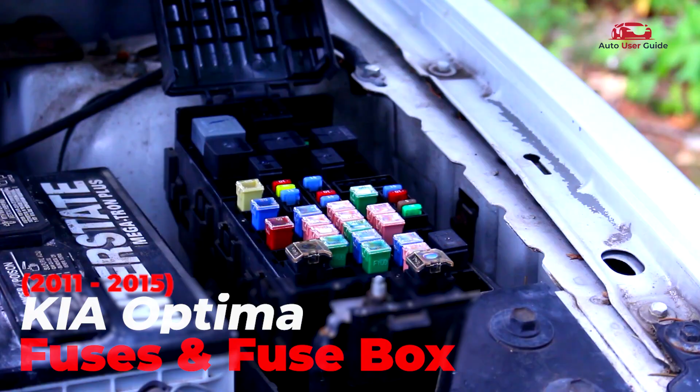Are you trying to locate the fuse box in your Kia Optima 2011 to 2015? In this video, we're checking out all the fuse boxes from the engine compartment to the cabin area. I'll show you where they're located and explain how they keep your sedan's electrical system safe and running smoothly.

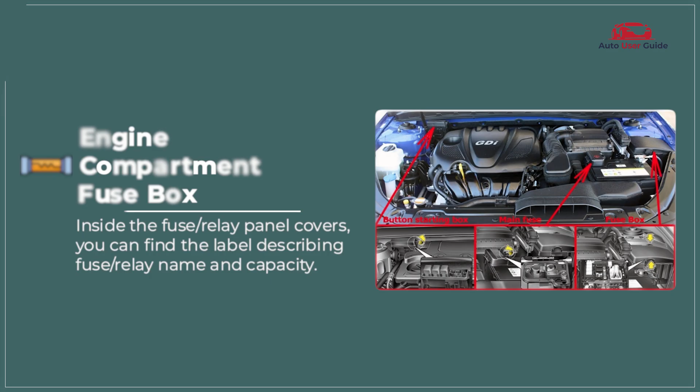Engine compartment fuse box. The engine compartment fuse box in the 2011 to 2013 Kia Optima features protection for major engine and power-related systems. It manages circuits for the engine control module, ABS, ignition, cooling fans, fuel pump, headlights, and other critical components, ensuring dependable performance and electrical safety.

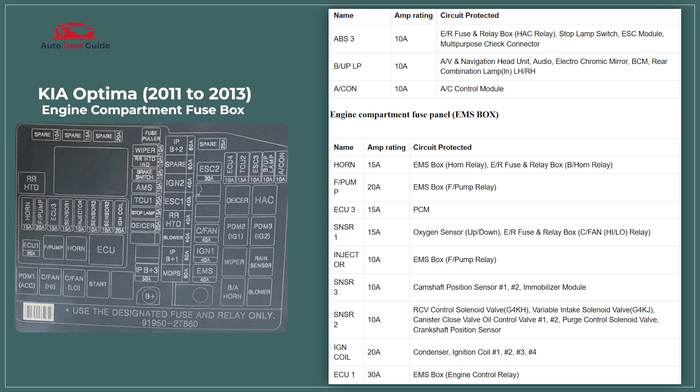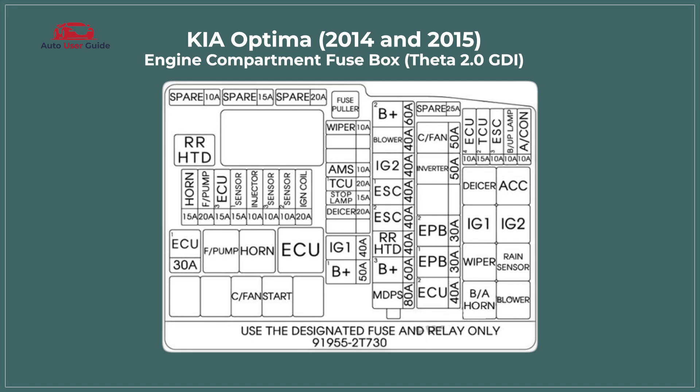The engine compartment fuse box for the 2014 and 2015 Kia Optima, equipped with the Theta 2.0 GDI engine, features protection for critical power and engine systems. It manages circuits for the engine control module, ignition, ABS, turbo-related components, cooling fans, fuel pump, and headlights.

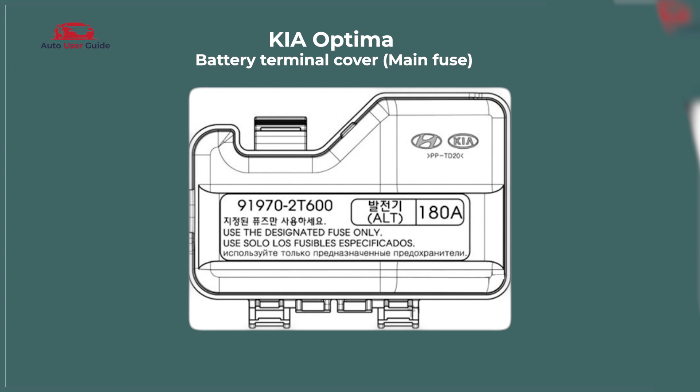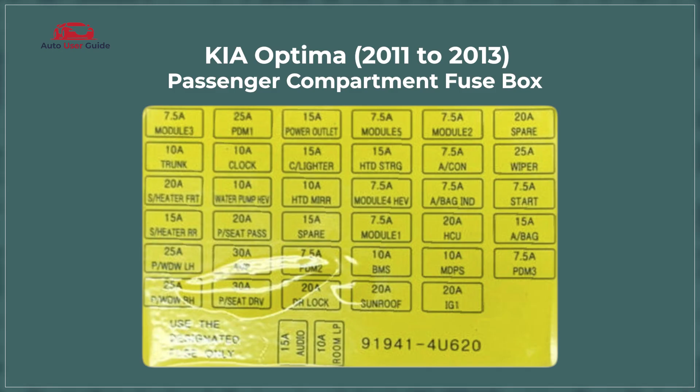Passenger compartment fuse box. The passenger compartment fuse box in the 2011 to 2013 Kia Optima features protection for key interior electrical systems. It controls circuits for the power windows, audio system, interior and exterior lighting, central locking, and wipers, ensuring safe and efficient operation of in-cabin functions.

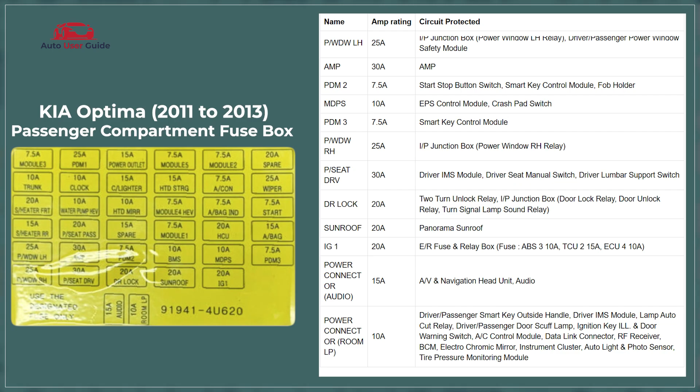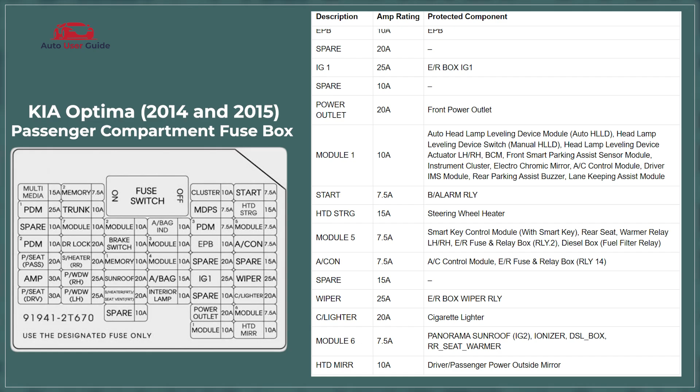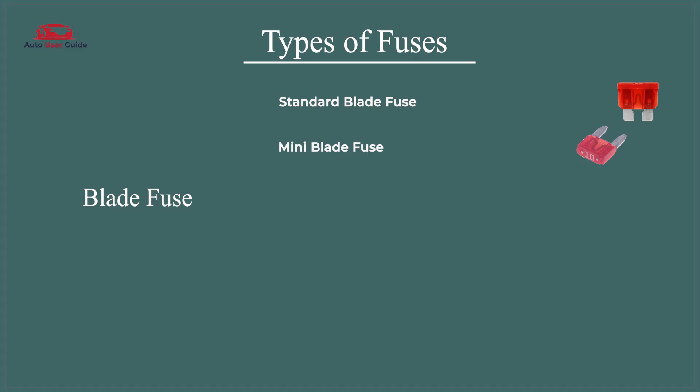Types of fuses: blade fuse, standard blade fuse, mini blade fuse, maxi blade fuse, micro 2 fuse, micro 3 fuse, J-case fuse.

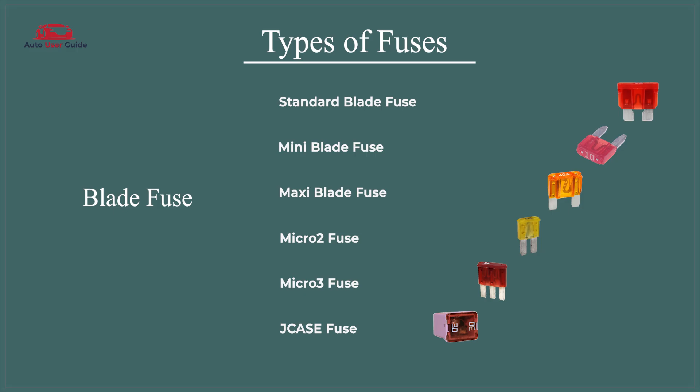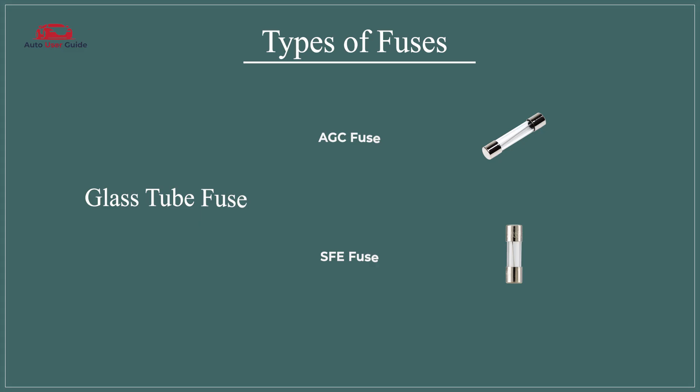Glass tube fuse, AGC fuse, SFE fuse. Ceramic fuse, Bosch fuse, DIN fuse.

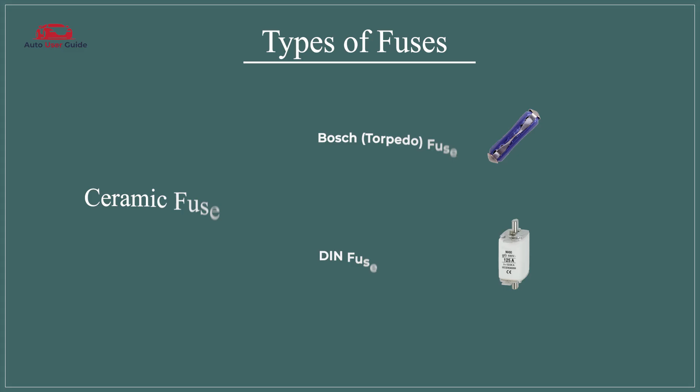PAL fuse, low profile PAL fuse, standard PAL fuse, link fuse, mega fuse, high amperage link fuse.

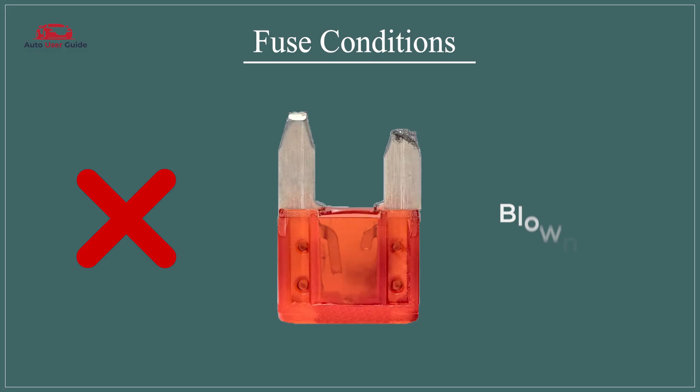Fuse conditions: blown fuse. A blown fuse means it's no longer functioning and needs replacement, while a perfect fuse is in good working condition and performing as expected.

How to change fuses: turn off the vehicle, locate the fuse box, identify the faulty fuse, remove the faulty fuse, inspect and obtain a replacement, install the new fuse, test the replacement.